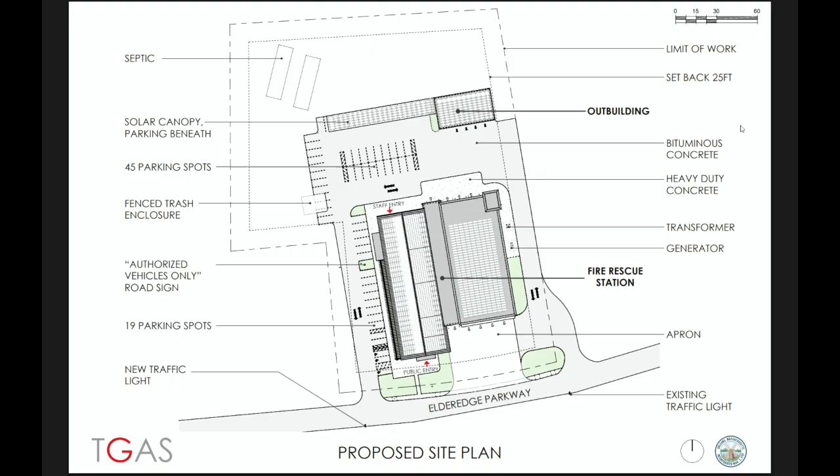When we move into the building plans, so first floor, the entrance—the south is basically on your plan to the east.

So you see the entrance on the right-hand side of the building. There is a lobby, elevator, and then all the bunks are on this side. Connection through the turnout gear and through corridor with the apparatus bay.

Fitness room, which Chief, just for your information, you were talking about the size of that fitness room. We went from the latest you had seen, around 720 square feet, and now we're at around 860. We were able to gain, by moving things around, a little bit more room in there.

And then there is a dining, kitchen in the back with the stair. That would be the entrance for the staff, so that they can go inside the building from their parking lot, or up on the second floor, which we'll see is for the admin.

Colors, as you can see, the red is what we call the hot zone, the zone where all the carcinogens are in the air. So we don't want those carcinogens to travel into the green area, which is the cool zone. The areas in yellow are the transitional area where, when we start working with the mechanical engineers, through ventilation and negative pressure, we'll make sure those carcinogens cannot travel into the area where the firefighters are living. Tower in the back, and all the kinds of rooms and areas that the fire department needs to support their operations.

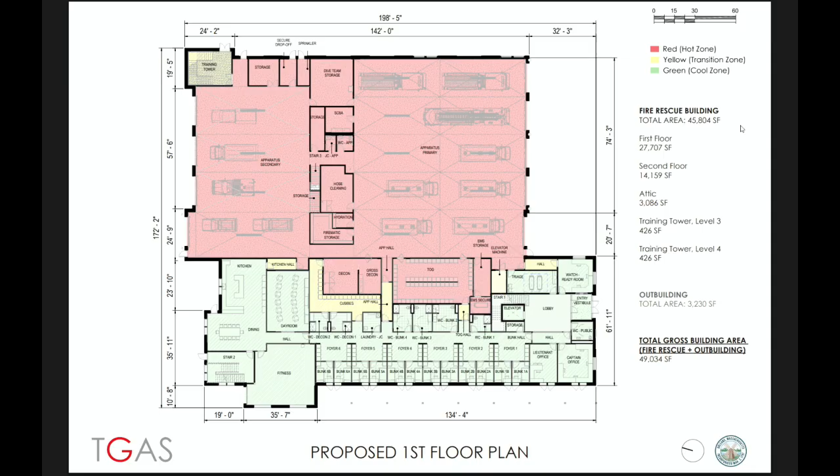Moving on the second floor, we have offices on the side and on the back, a couple of conference rooms, a training room with a kitchenette and break room. Then this is, of course, the stair that connects the two floors, and then the stair in the front with the elevator.

On the other side, on the apparatus bay side, these two bright pink areas are double height volumes for the apparatus bay, because of big trucks and operations, big overhead doors here, so they need a bigger height than a regular floor.

And then over those accessory rooms that we saw on the first floor, we have a mezzanine space that, from a transitional vestibule here on the side, connects through the back to the training tower. This mezzanine can be used also for training, for storage, for many things. We found that fire departments like to use the mezzanine for all kinds of things. There is also a stair here for quick access from the apparatus bay area to that mezzanine area.

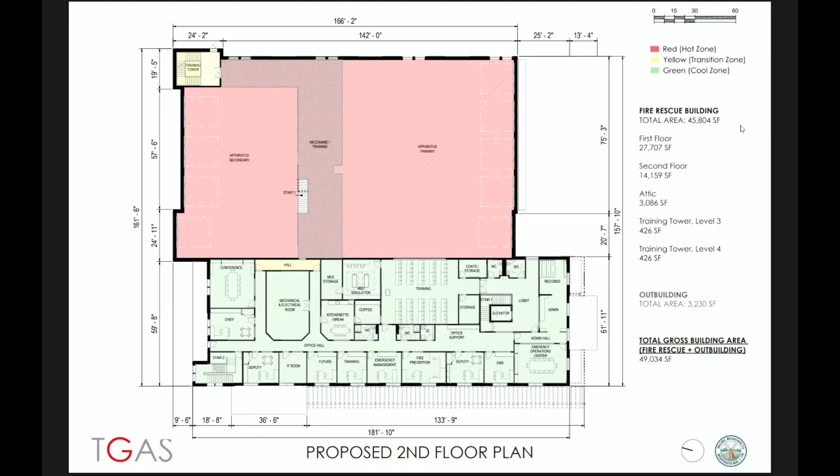On the side here, there's the trellis. We have a canopy in the front to shade the entrance of the building.

Moving on, we just started to think also about an attic area, accessible from the back of the building, not the entire square footage of that volume, but just part of it can be used for attic. We still have to coordinate with our engineer and see if it's going to have some mechanical system, or if it's going to be all additional storage for the fire department if needed.

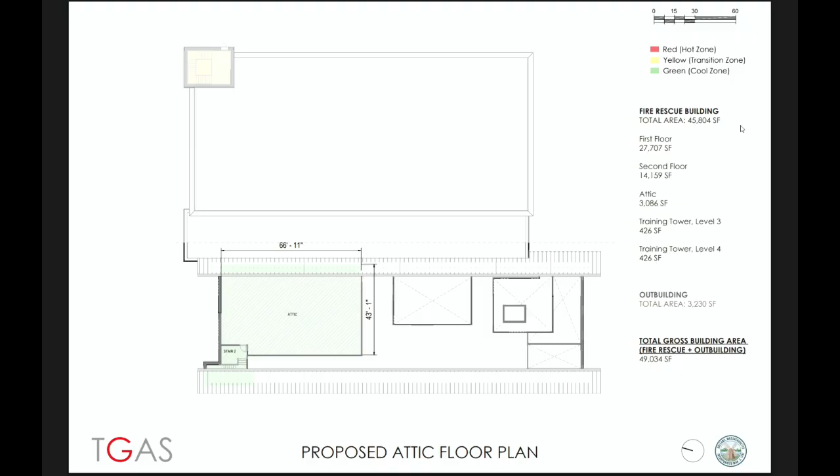As you can see, the total gross building area is around 49,000 square feet, which we discussed lately. But the attic floor is just a small part of it, and we don't think we need to cover the entire volume for the attic floor.

We're thinking about doing some cornice at the top, just so we don't have a flat line on top. But also, as Rick mentioned, a gable roof adds volume to the building, and that volume has a cost. It doesn't have as big a cost as the other part of the building, but it still has a cost, and being a big volume, it adds up into the construction cost of the building.

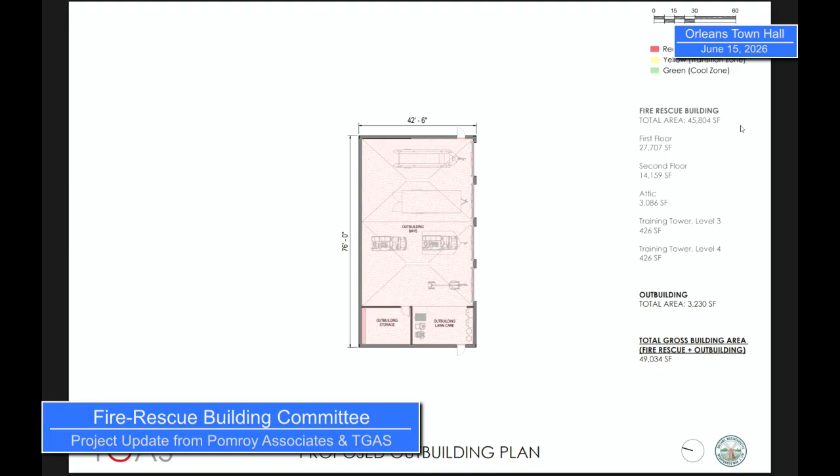So moving on, we have the outbuilding plan. The outbuilding is going to be a very simple volume, just for some additional vehicles for the fire department, and a little bit of storage. It's going to look very simple. We're going to have some siding over the main volume, and then as you've seen in the site plan, there's going to be the canopy. There's going to be some solar panels on top of the building itself, and then a solar canopy that will build on the right, starting from the side of the outbuilding.

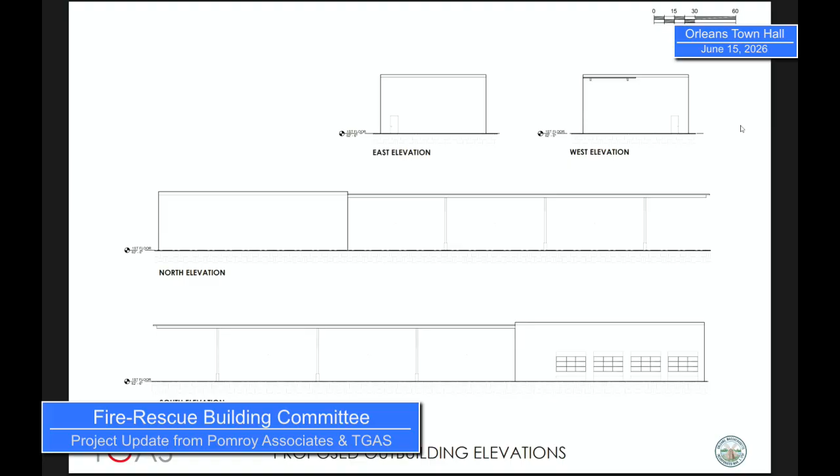As far as view, so we advanced it a little bit, the view. So now you can see some refined view again, not the material yet - that's the next step, as Rick mentioned. These are already more refined compared to the latest view that you have seen.

So the next step for us would be to start showing the actual material, and maybe do some Photoshop work to put these in the actual context of the street view, to see what residents will actually see when they're driving on Elderedge Parkway.

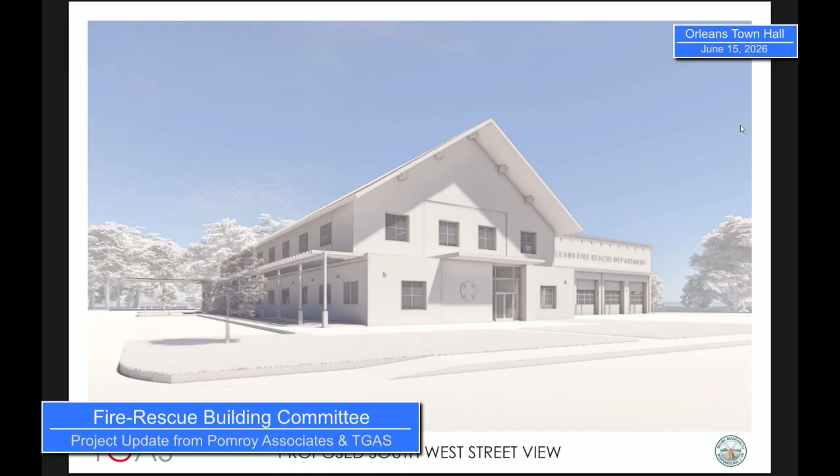If we move ahead a little bit on Elderedge Parkway, now we're close to the entrance of the living and admin area, with the trellis on the side and the gable roof with the solar panels, and then moving around the building.

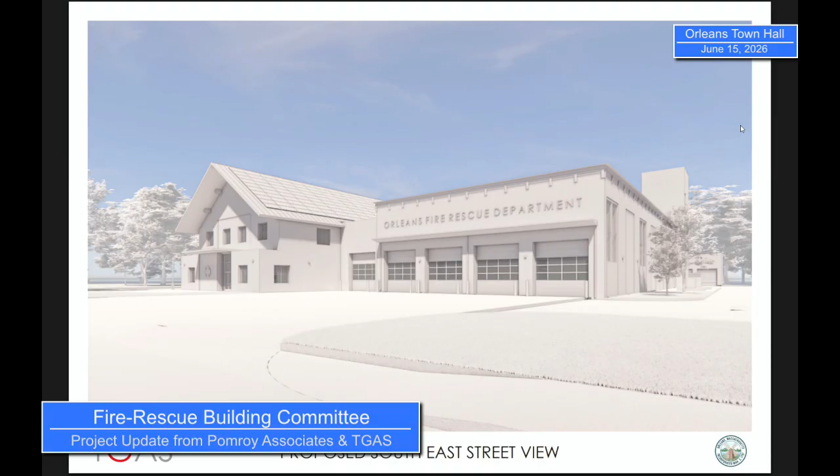So these are the four views that we had worked on, and we'll mostly work on for the renderings needed for community outreach, to show the community what the new building would look like, and to get feedback on that.

As far as schedule and budget, we're ending the SD phase, as you can see, mid-June here - there's a big yellow strip saying we are here. After that we'll start working already on design development, because there's a lot of work to do there, starting the conversation with the consultant.

That's a big part of it, because the consultants just put together some of the narratives that you see in the package, but they didn't start working on the model itself. So we have a BIM, so-called model - Revit model, building information modeling - that we have built.

Now we'll share it with our consultants, and they'll start to put their pieces in there, like all the equipment for the MEP guys. The structural guys will start to put in beams, work on columns and ways to support the roof, the gable roof, and the entire structure.

So now we've entered a big phase of design development. There are pieces we can definitely start working on while we're going through the community outreach process, pieces we will still have to go through no matter what the results or feedback we receive.

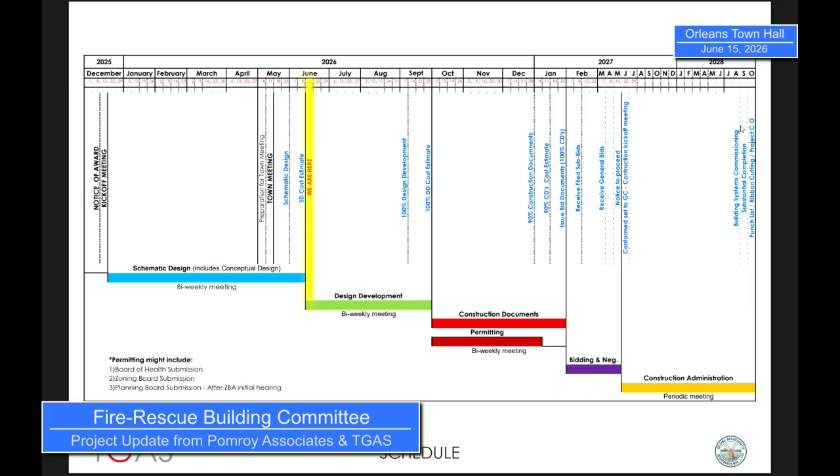So I would say we're off of our original goals and objectives - a month plus off schedule. A lot of time was spent from mid-December till now, all for the right reasons, because there was a lot of information that needed to be gathered and presented and a consensus to be gained. We can deal with that. The design, development, and construction document phases is when we become a little bit more rigorous.

We're going to have a decision-making matrix, and we're going to need to move at a valued pace in all the decisions that we make. In other words, we're talking about the building elevations and the materials. If we labor over that for a couple of months, that's just going to put our design development phase back.

So it's our job to control that schedule for you, and we'll be laying all that out for you. During the design development phase is when we start narrowing down all of our soft costs, because we have a big amount of soft costs included in the overall budget. So we still need to nail those down and get quotes for different pieces of equipment and so on. There's a lot that happens in the design development and construction document phase.

A lot of people, and it's a locomotive that is moving. So if we stop at any moment, the momentum is lost. It's our goal to keep us on track, and we'll be giving you regular updates on those decision-making milestones. The working group has been fantastic. The dynamics and the feedback we're getting are perfect, and we're able to move things at a very good pace.

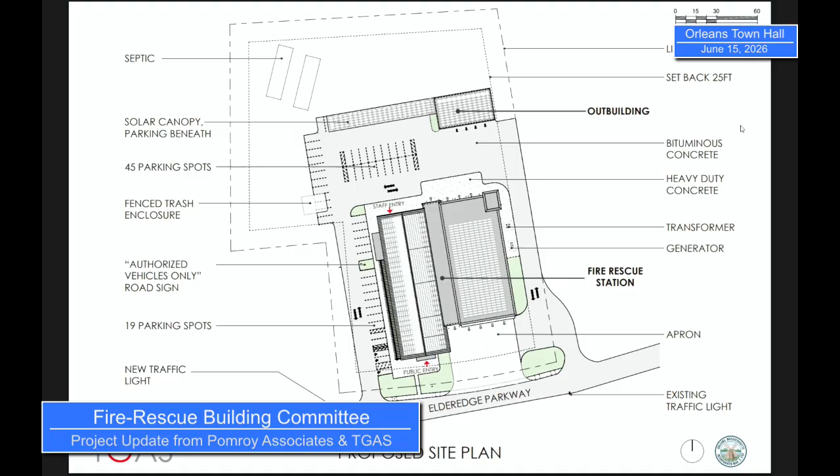I think one of the points also when we started working on the site plan was visibility for the fire department when coming out of the station, right? So that side was a little bit more open compared to the other side, where we were saying trees and vegetation. So I think it was also, Chief, correct me if I'm wrong, it was a visual consideration—definitely the curve of the road and some of the topography there, making sure the trucks are visible as they pull out, and how we work with the site that we have. I think that was a consideration that way. And then we did start looking at that, considering, those lines you see—we have some more work to do—but those lines you see originally in the first, very diagrammatic sketch, we didn't have anything on that elevation, it was just brick.

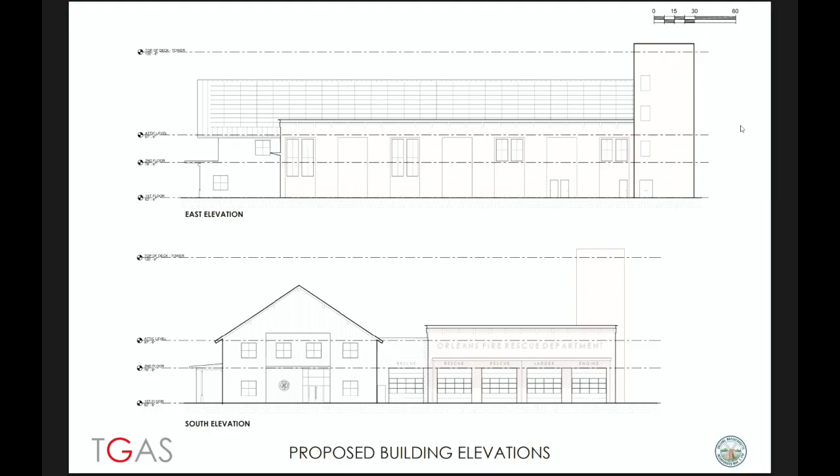Now we're thinking about doing some recessing of the window in there. The higher window that you see on the right is because we have a mezzanine up there, so those are higher windows. But definitely there is still some work to be done on these elevations. I understand—I don't want to see this thing get undue criticism because people are more concerned about what it looks like as opposed to the function it actually serves.

Yeah, no, we're closer than you think, I really do think that. And the renderized view, I think, will help—yeah, absolutely—to appreciate and get the depth of the material, the real color. That will help a lot more to understand the dynamics of the building, I believe. Obviously, it's night and day between this rendering and the later ones, and that makes a huge difference, and as you refine them even more, I think people become more accepting and willing to look at it with that, yeah, definitely.

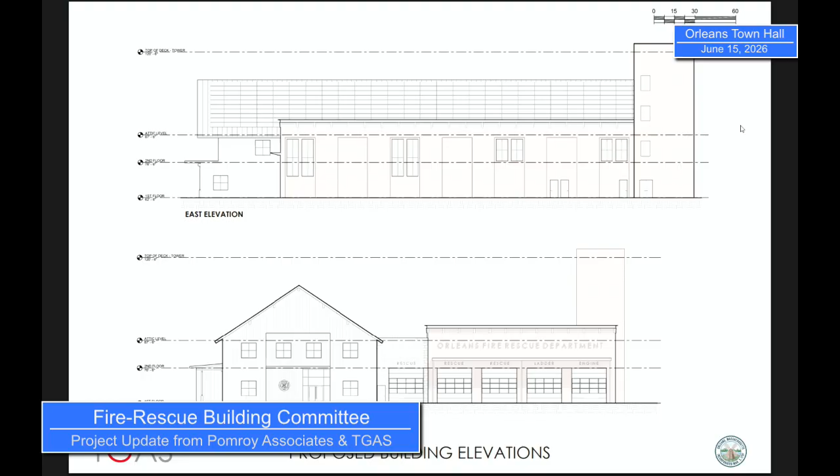I think we had the last slide, but it was basically the budget that Rick mentioned in the beginning, just to show at the end. It was a little down here, but just to show that we are in that 55 million number that we had discussed also at town meeting. Again, a lot of work to be done—DD, when we get a lot more into detail, we'll refine these numbers even better, and with the reconciliation we'll be able to have some real solid numbers to work with.

If you look at line 11, that's where the difference is between what was carried and valued for town meeting, and then the next column over, line 11, is the estimate that was just received last week. So we're within $90,000 of where things went. We were really happy to see that. And the goal is to continue to refine—we're not sitting still on that number. If we can find cost savings, we will, all the way along.

Everything I was talking about, the soft cost—all of it—we have $9.3 million of soft cost. Our goal now is to start getting those narrowed down, getting those finalized. We can't issue purchase orders just yet for items, but the things that we can narrow down, we will.

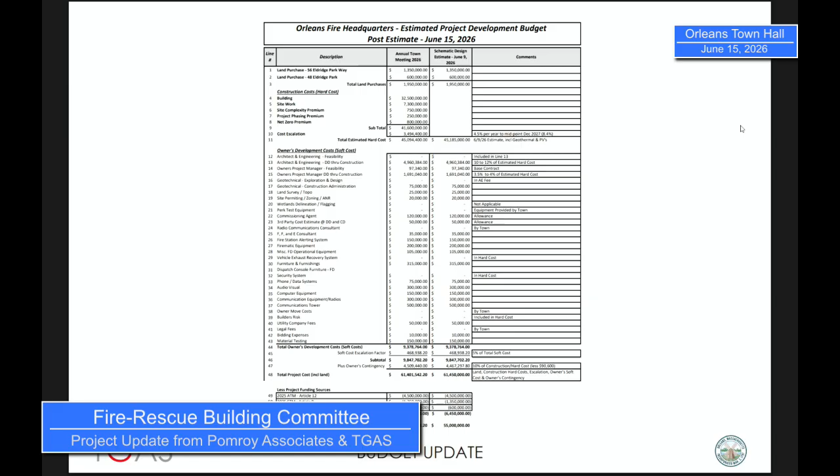You can sit here if you're more comfortable. I can stand.

Good afternoon. I'm Andrew Miao, an architect. I serve on two town boards, Architectural Review and Old Kings Highway, but I'm not here to represent either committee. I want to talk about two issues tonight that I'm concerned about.

The first is energy and cost, of course they're closely related. You are all working on a building for net zero. Question one: have calculations been made to balance the different elements that go into net zero and the cost effectiveness of each and every one of those things?

Geothermal is very expensive. Do we have enough solar panels? What's the trade-off between solar panels and geothermal? Can we achieve net zero? And who monitors the net zero?

The other part related to that is how materials affect energy. I think that's very clear to everybody. The brick and CMU backup wall is not the most energy efficient wall. Brick itself is a high maintenance item because of efflorescence—things drip white and need clearing. That leaching is usually from the mortar, and I have not seen anybody able to avoid that.